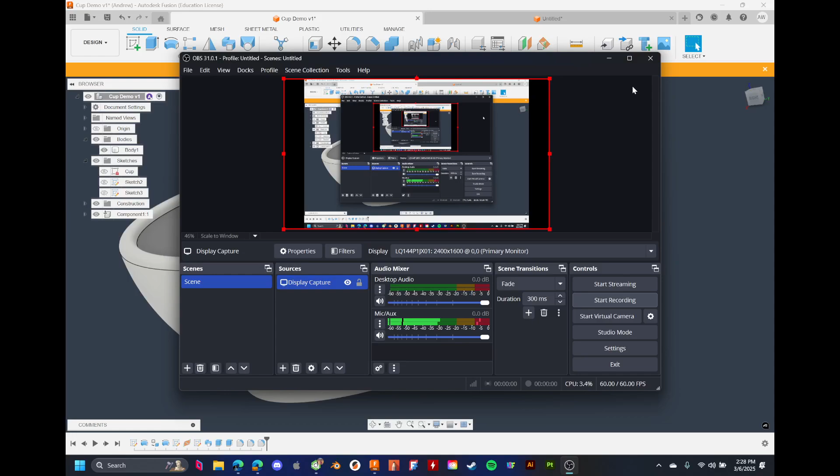So we're going to do the same demo in Fusion. And we're going to start with a new file. And the way that we're going to do this in Fusion, at least initially, is we're going to start with a new cup design. So what we're going to focus on first is actually modeling the inside of the cup pretty much only. So let's say that our cup starts with a nice little kind of flat bit on the

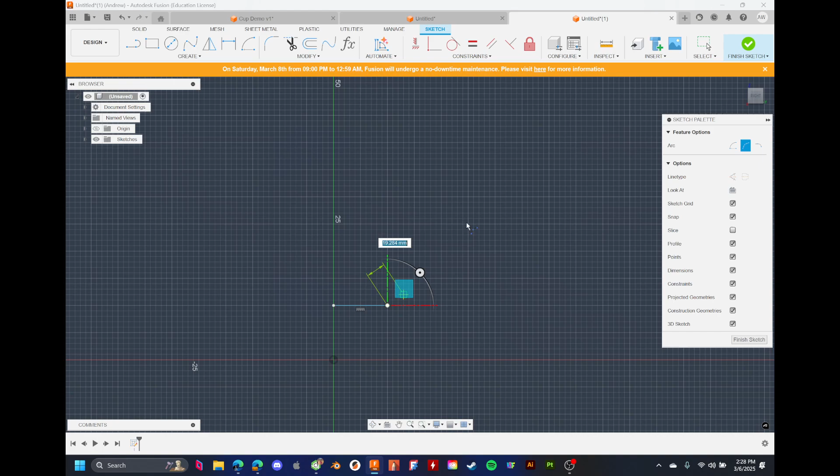inside. And then we're going to say that it's going to do an arc, a 3-point arc. It goes from here to here. It's kind of an okay cup. And then that's like a nice inside of our cup. Right now, we don't need to worry about anything else. I'm actually also just gonna drag this slightly so it's more like this. That looks a little better.

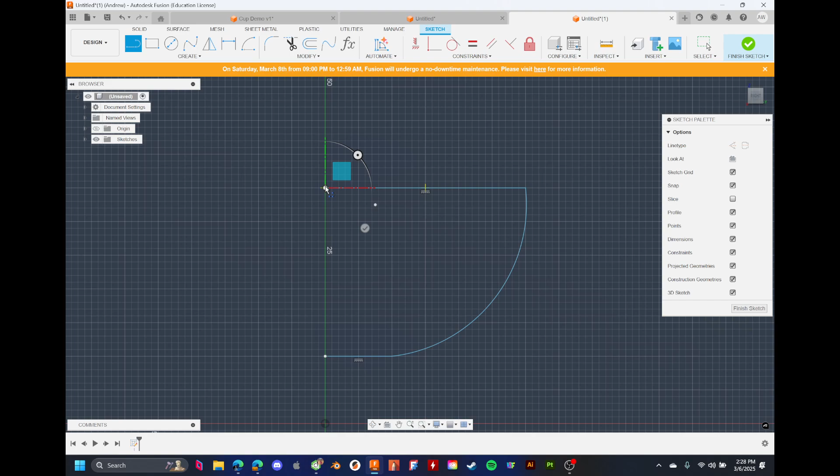And then what I'm gonna do next is I'm gonna draw a line that goes from here to the origin and then down here, so that we essentially have a complete face of the inside of our cup. And you'll see why this is important in a minute. Another thing I forgot to mention is that we're going to go into the document settings and we're going to change the units to centimeters. And I'll explain why when we get there.

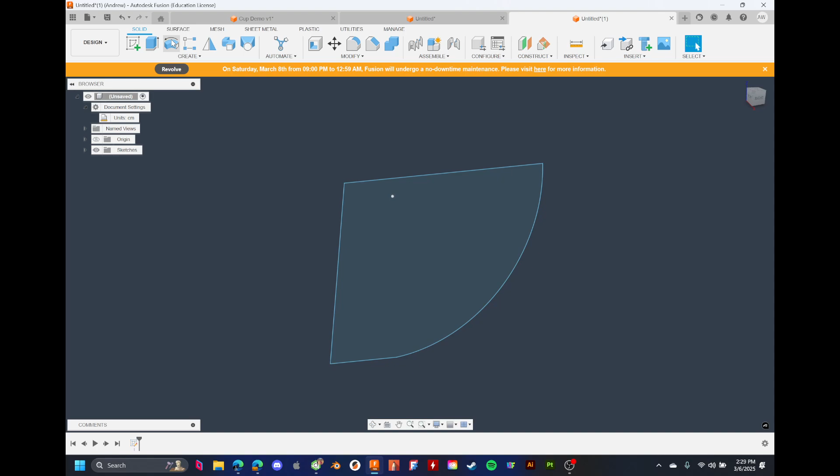Cool. So now that we have that done, I'm going to do a revolve. A revolve is basically when you take an object and you sweep it along a circular path or around a central axis. And this is pretty similar to what happens in Onshape, in SketchUp, where you're creating a circle and then the follow me is tracing the path of that circle. It's essentially doing the same thing with a pole in the middle.

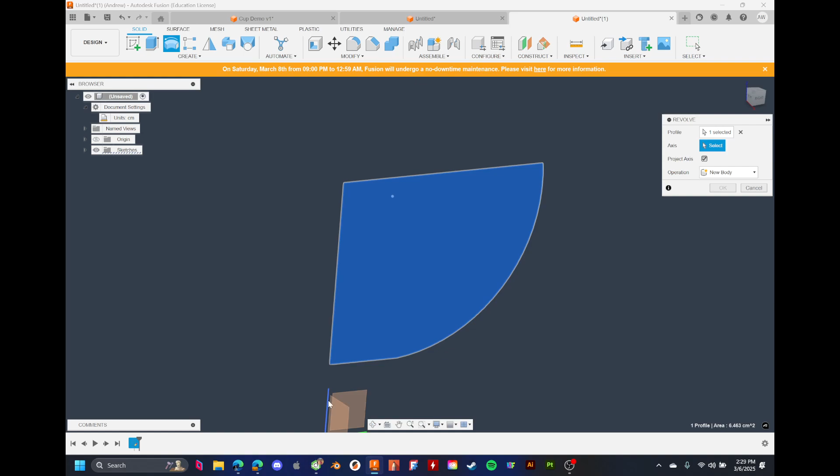So the axis that we're going to select is that blue Z axis. And we look at that. We've got a kind of a bowl shape. And the important thing about this is that this is a solid. So if we look at this, this is a solid, and it's a representation of the inside of our cup.

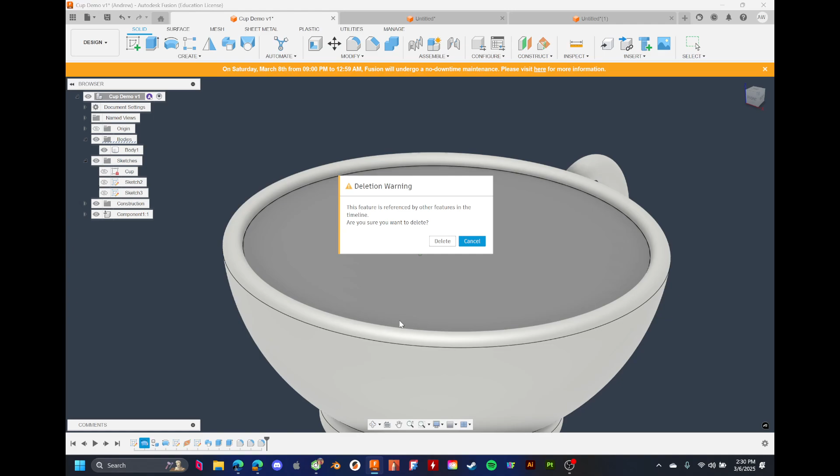I made a cup previously in Fusion, and you can see that this thing, even I have this revolve in here, but I'm gonna get rid of it. Actually, I'm apparently not gonna do that. I don't know why. Oh, I know why. We're gonna get rid of this. Then we're gonna get rid of this. Don't worry about this. This wasn't crucial. This cup, you can see that if we were going to measure the size of this cup, and let's make sure that our scene units are centimeters.

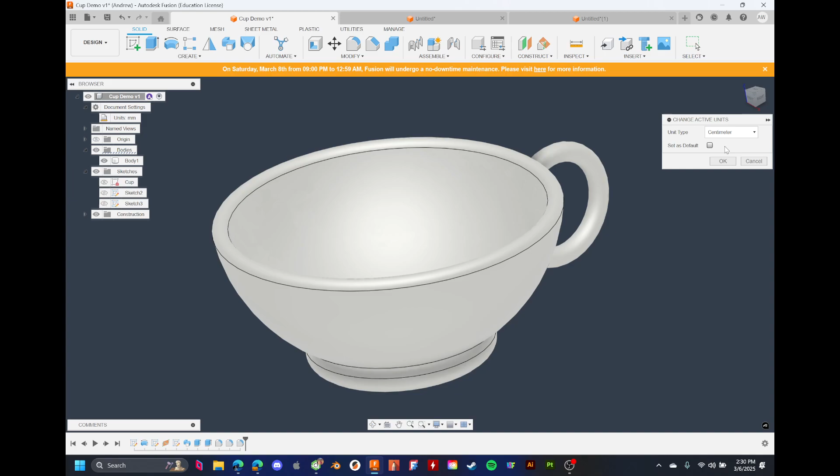If we were going to measure the volume of this cup, what we'd do is we'd right-click the body and we would say properties. And you would see some properties here. You'd see that the volume is 19.541 cubic centimeters, but that's not the volume of water that it can hold. That's the volume of material that you're going to be using. So you could actually use that to determine how many cubic centimeters of filament you might use to print this. But we don't care about that.

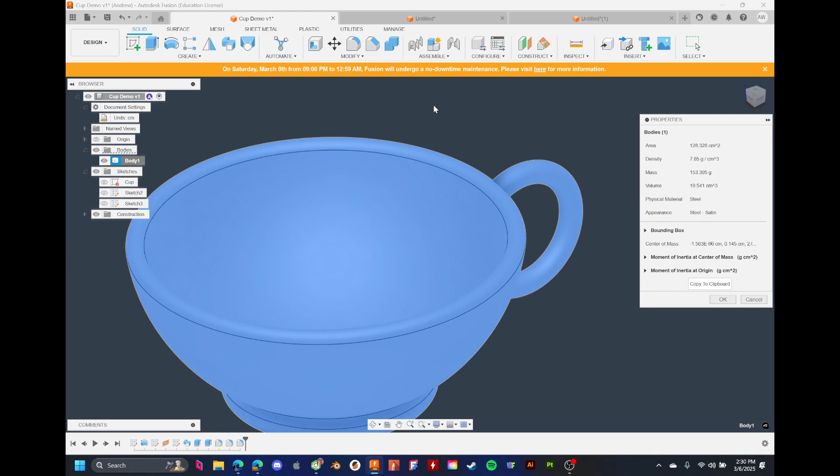What we would care about is this inside face. Imagine that this is the water in our cup. And there isn't necessarily a flat section here that would close this little area up to be a solid like we just made, but we're pretending there is. So again, just to be clear, we are only worried about this section, which we've modeled here, and we have a flat top, so this is a solid. You know, this is a complete object.

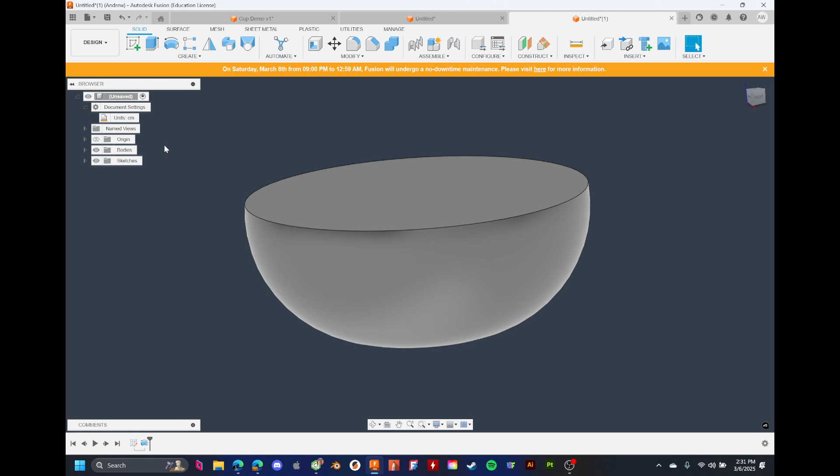So if we go to body one, oopsies, didn't mean to do that. Go to body one, go to properties, we can see that it's actually not that big. It's actually pretty close. It's 54.351 cubic centimeters. And I mentioned earlier, we wanted to convert to centimeters.

We want to do that because we want the centimeters, because milliliters, and you want to shoot for around 60 milliliters in this project, are 1-to-1 with cubic centimeters. So if we can get our cubic centimeters to be 60, then we can get our milliliters to be 60. So we know that it's 54.351 cubic centimeters.

And I have a little equation that I'm going to pull up in Desmos, which is here. It's that we have something in place of x cubed equals 60. So this would tell us we're putting something in front of x cubed. And if you did the algebra, you would see that this would help us find what we basically would need to multiply our thing by to get our 60 value. And what was it? It went away.

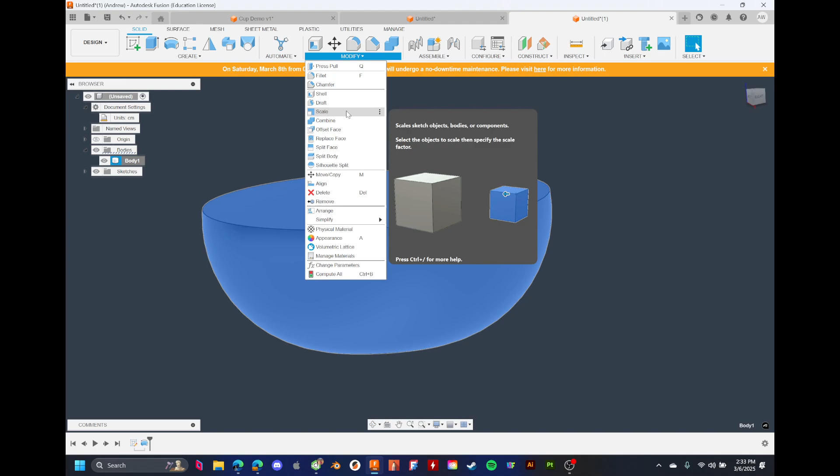We go to properties, 54.351, it's not going to be a lot. So if we do 54.35, we can see that our answer is like 1.033. So we're going to go back to Fusion. We're going to hit cancel. We're gonna hit scale under the modify menu. This point, I guess we'll just not worry about that. Scale type, scale factor, 1.033. It's a little bit bigger now.

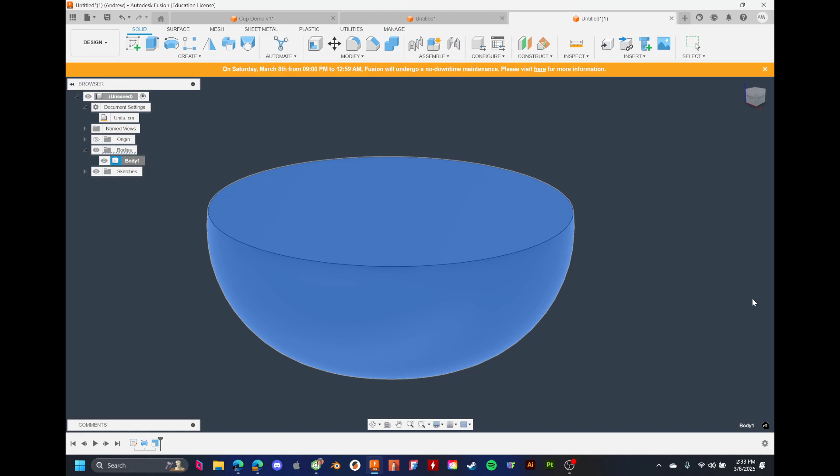If we go back to our properties, it's almost exactly 60. You can get some more level of detail if you want. So you might say this isn't very helpful, but it is, because now you know what the scale needs to be. And if we go back in time and edit this sketch, we can get rid of this line and this line. And we can make a super simple version of our cup that kind of wraps up here. And I'm gonna offset this to be like 3 or 1.

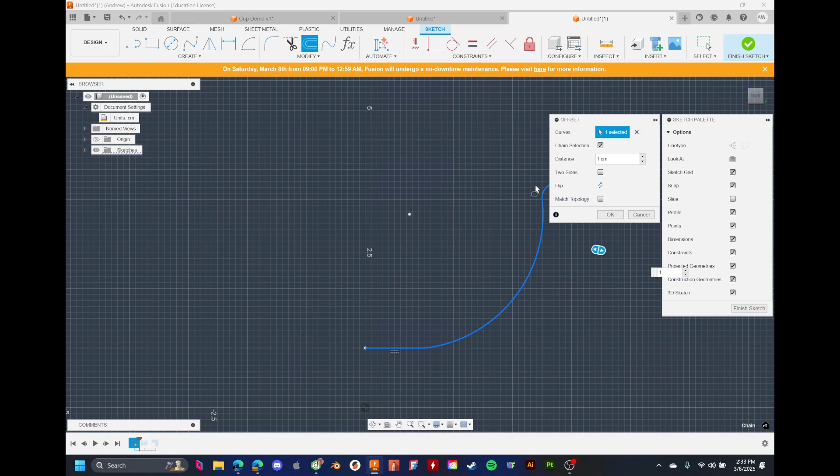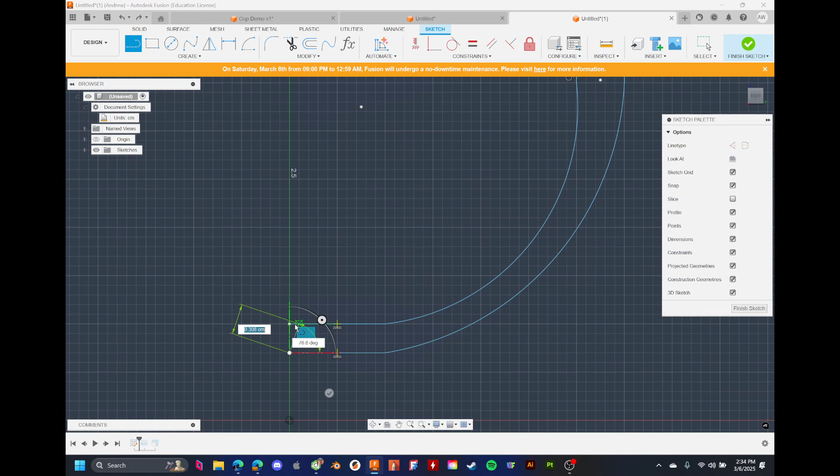Oh, we're doing centimeters now. That's why it's all the way over there. Let's do 3 millimeter. Point is, we could finish our cup doing another 3-point arc that goes down here. This looks really bad, actually. But we're just gonna wrap it up and be simple. Oopsies, I did not do that right. You wanna connect it here. You wanna have this profile. We're gonna finish sketch. When we do our revolve, you can see it actually fixed our cup. And if we did our scale, it's gonna size our cup up the same way.

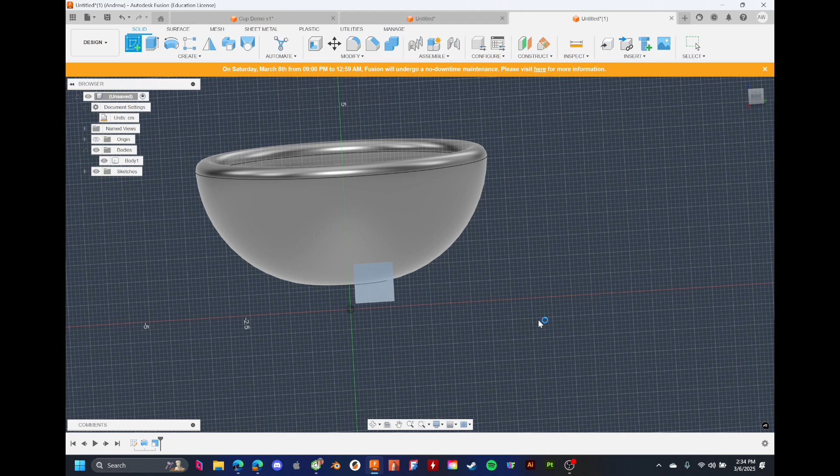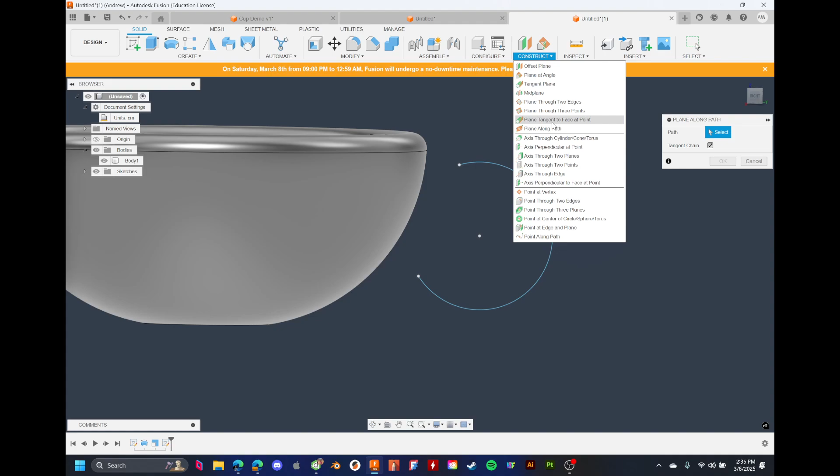And now that you have the right size cup and you know what your cup needs to look like, then we would go to create sketch. I'm just gonna show this feature off because it's so good in Fusion. You do an arc. Let's say we have a 3-point arc. You would do your arc like this, drag it around a little bit, hit okay. This arc is the path of our handle. You're gonna do a plane along path. Click this guy. Now you can sketch the profile of your handle here.

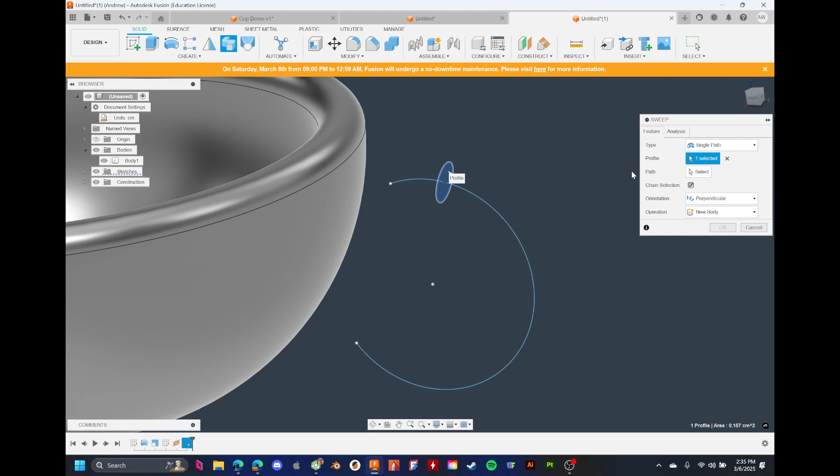If we do create sketch, and I don't remember exactly where we should start, but here-ish. We go back, we can sweep our profile along our path, and look at that. We've got a handle, and this is the best part. You can extrude the faces up to object, and they're just gonna connect right onto the object. And that automatically makes it a solid piece. This whole thing is now just a solid. There is no conflicting geometry in here. It actually would work really well.

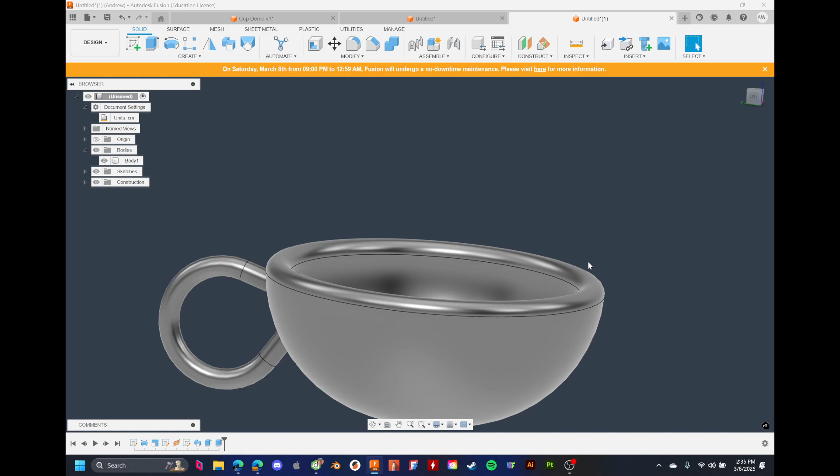And I actually brought in a demo of this cup that I made that I'll pass around, and go grab from the BTU because I forgot to grab it. But if we were to verify, this will hold. I'm very confident that this would hold 60 milliliters. So yeah, that's all there is to it.